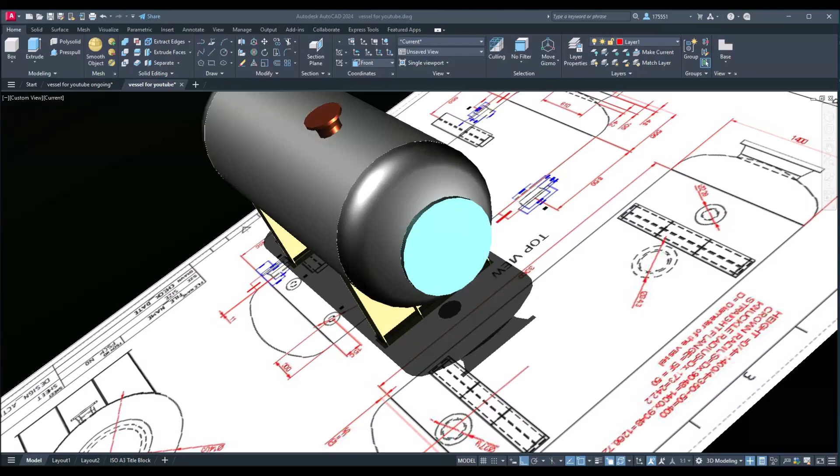In this tutorial, I'll begin by sketching the vessel in 2D before transitioning to a 3D model in AutoCAD.

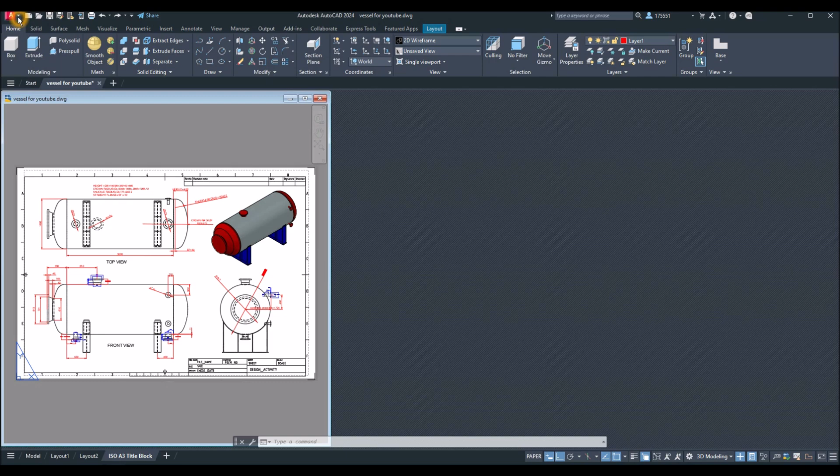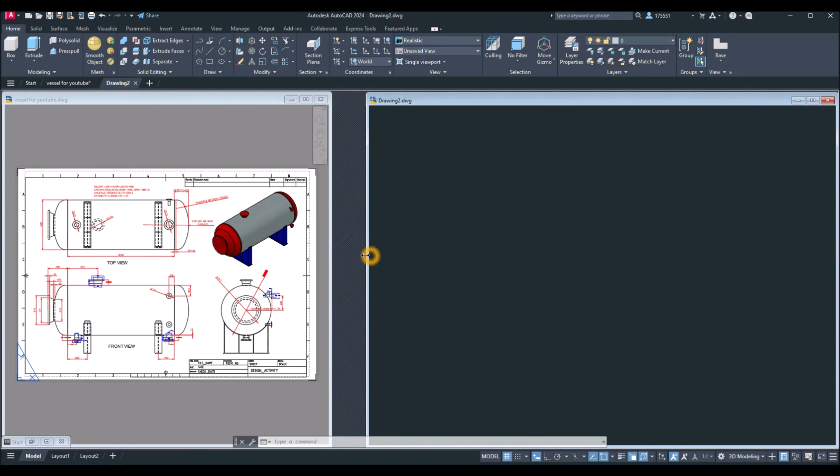Start the drawing by clicking this drop-down arrow and click New for a new drawing. I'm using AutoCAD 3D template for metric units because I'm using millimeters, and click Open. I'll adjust the windows to allocate space for my reference drawing, this one. Make sure to work on parallel projection by clicking this drop down arrow and select parallel. I'm going to start working from front view, which is this drawing here.

Now I'm going to start drawing a rectangle. Go to draw panel inside the ribbon, select rectangle, click here, move your cursor to the right and enter 3000, then comma, and 1400 for the height,

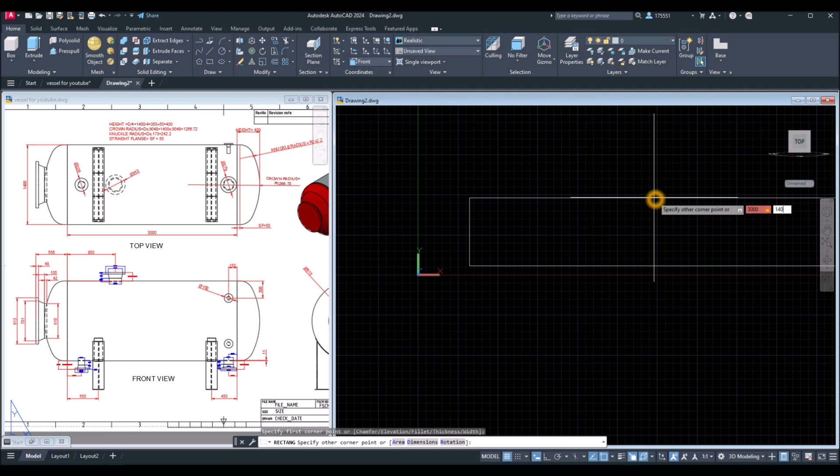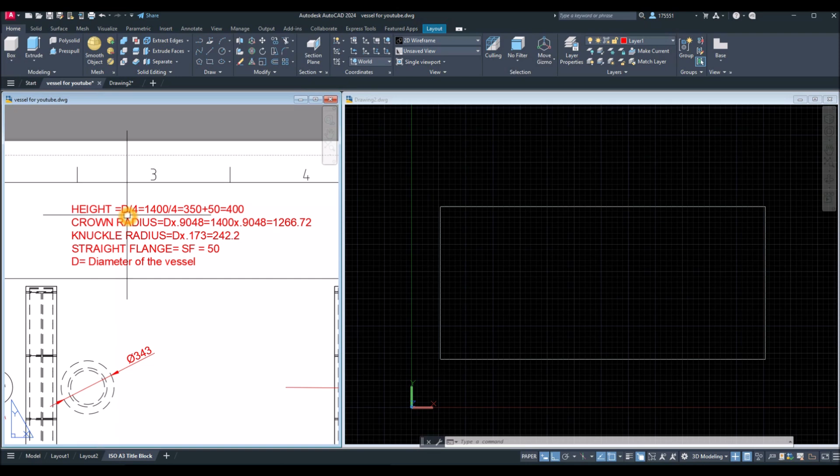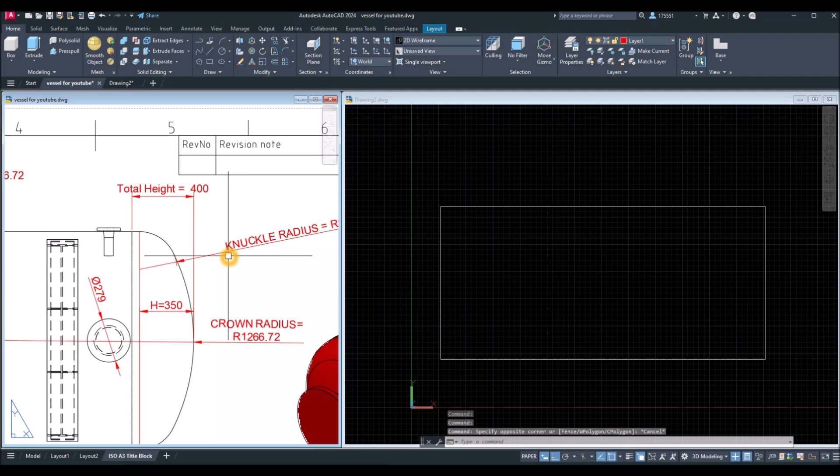and enter. I derived the dimension of the dish head from this formula. D stands for diameter of the vessel, which is 1400. So the height is D divided by 4 plus SF. Diameter divided by 4 is 350 plus 50, so SF is this given straight flange, and for the crown radius it's diameter of the vessel times 0.9048. So this is the crown radius, and for the knuckle radius, which is this one,

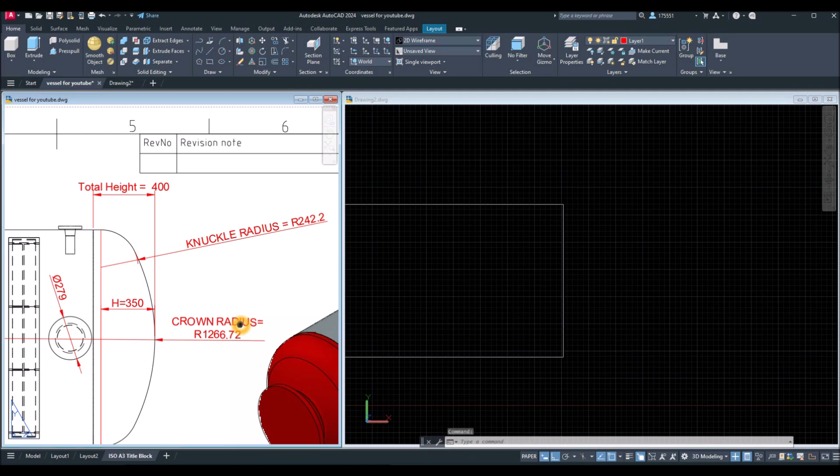is diameter times 0.173. Straight flange is given, and as you can see here, D stands for the diameter of the vessel. Now, I already created a dish head layer, so it's easier to separate the color. And I'm gonna draw a line. So L for line from midpoint, go sideways for 400. And create a circle,

1266.72, and enter. And move this one from quadrant to endpoint. I'm going to draw a line from endpoint and go sideways and trim.

So TR for trim command, enter twice. Click that one, click this unwanted segment, this one. We only need half. And for the knuckle radius, I'm going to use this to create this curve here.

I'm going to use fillet. Inside the modify panel, select fillet command. Right click, select radius option and enter 242.2 and enter. Click this line and click this arc.

Now I'm going to create another line from endpoint to endpoint. Now I'm going to join the segments by typing J for join command, enter, and just window the whole thing. Now this is one object.

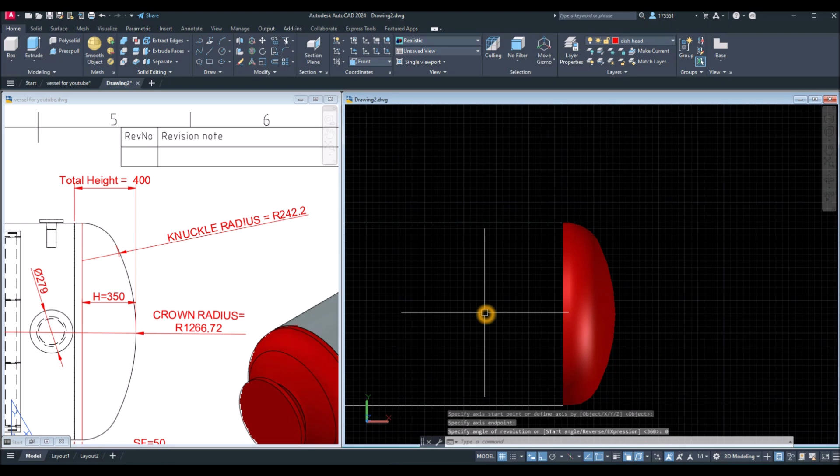Now I'm just gonna mirror this one. Mirror. Specify first point of mirror line. Click that midpoint and go upward and select no.

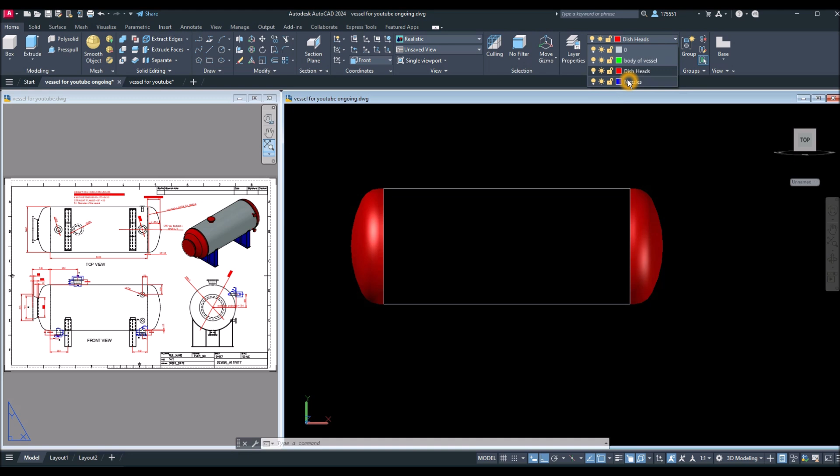I created a new layer, a separate layer for the nozzles. Click this drop down arrow and select nozzles to make it current. Now I'm gonna hide these two. Select the two objects, right click, hover over isolate and select hide objects.

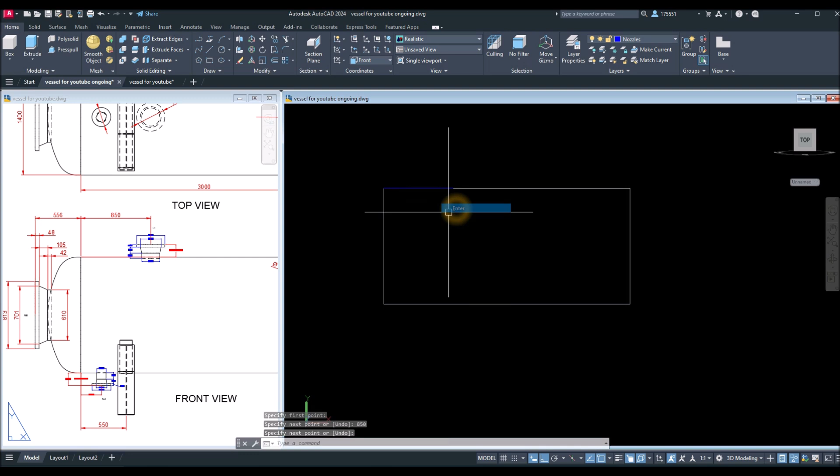Now I'm going to draw a line from the corner of the seam line to the center of the nozzle. This is going to be the guide. So endpoint, go sideways and enter 850 units. And the outside projection from the outside diameter of the vessel is 150 units to the face of this nozzle. So another line from endpoint, go upward for 150.

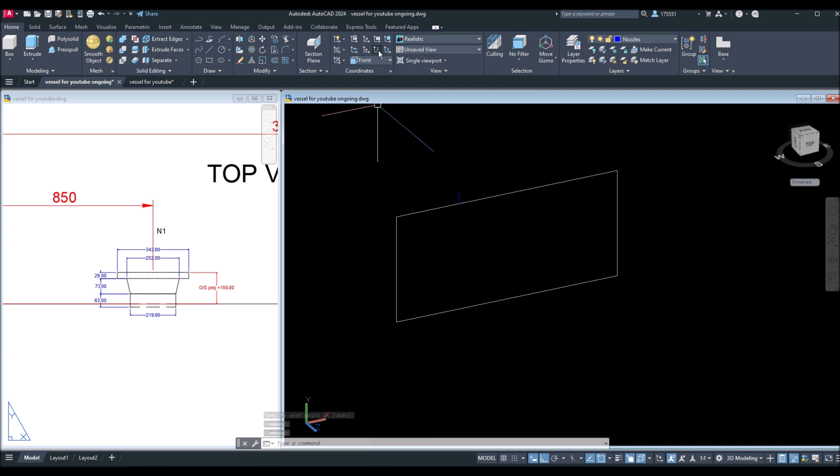Now, hold down the shift key and the wheel of your mouse and move this slightly and change the direction of your Z-axis vector. Inside the coordinates panel, select Z-axis, click anywhere on the screen and move it upward. So Z is the direction of the extrusion.

Now I'm going to create a circle with a diameter of 343. I'm just going to bring this closer. C for circle, snap that endpoint, type D for diameter option and enter 343.

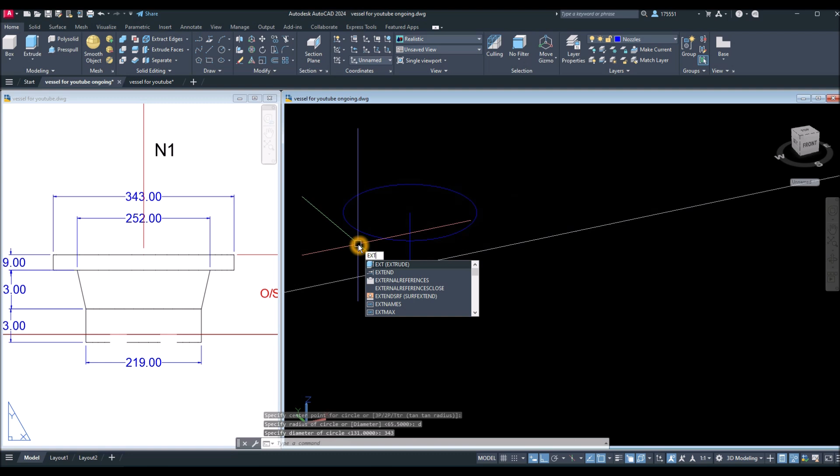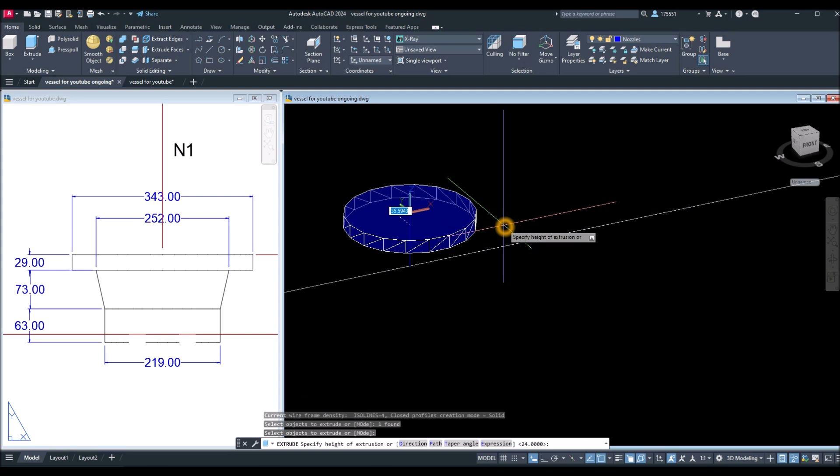Now extrude this circle. EXT for extrude command, select the circle, enter and move downward for the thickness here, which is 29. Maybe change this one to X-ray so it's easier to visualize. So EXT for extrude command, select the circle, go downward for 29.

And create a circle. So I could delete this now, this is just a guide. C for circle, snap the center, type D for diameter option and enter 252, which is this one here.

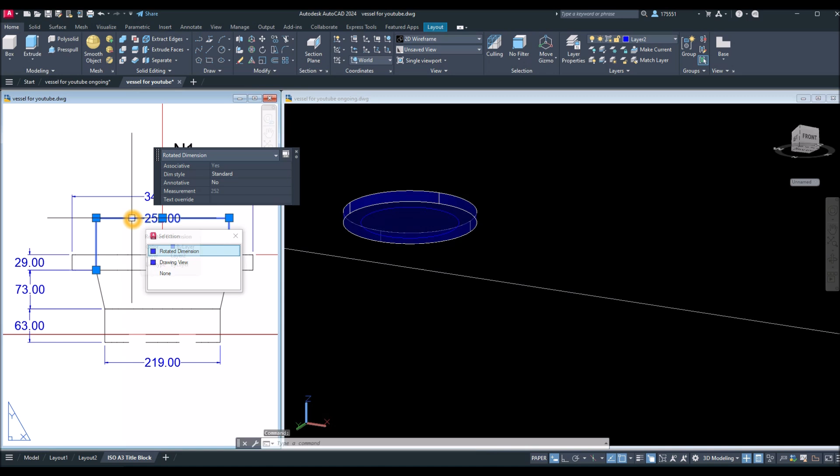Another circle, snap the center, type D for diameter option and enter 219. Now move the smaller circle. You can click anywhere as base point and move it downward. So the gap is 73, so enter 73. So this is the gap

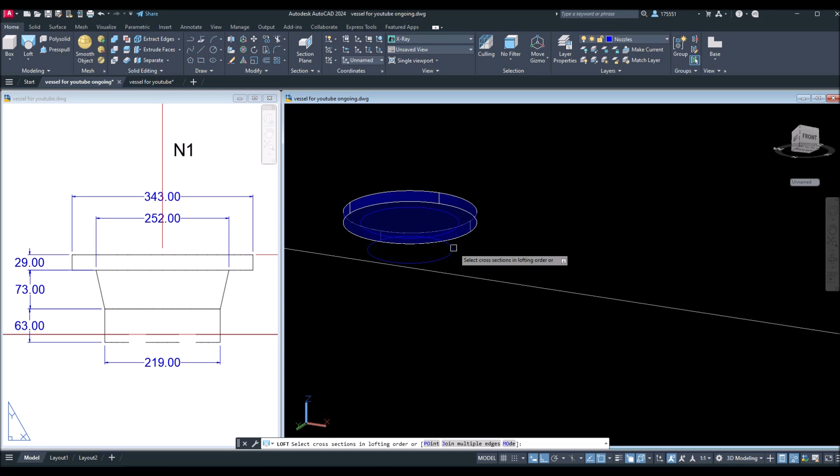between these two circles. Now these two circles are not of the same size, so I'm just going to use the loft command. Inside the modeling panel, click this drop down arrow and select loft, or you can just type in loft. Select that circle and select the other circle. Enter and enter again. Now, the gap here is 63 between these two lines.

So what I'm going to do is just use the press pull command inside the modeling panel. Select press pull, hover over this face, left click, let go of your finger, bring down your mouse for 63 units.

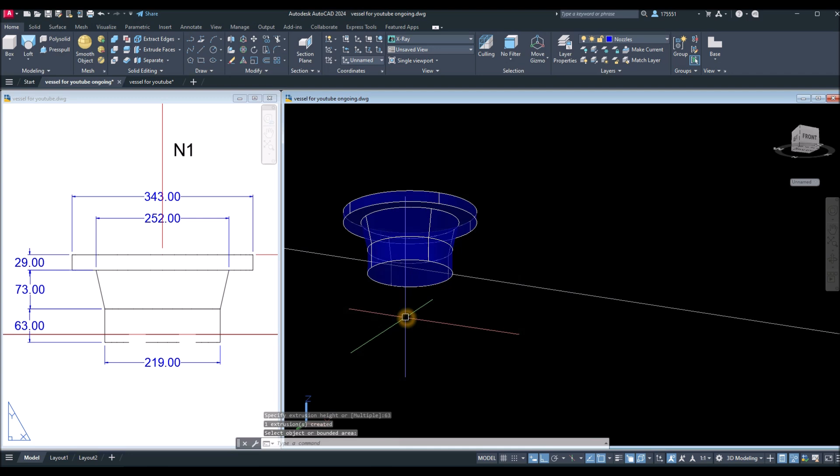Just going to bring this to front view. So our N1, or nozzle 1, is done. The next one would be nozzle 2 at the bottom.

Alright, so another guide from in point. Go sideways for 250, enter. And the outside projection from the outside diameter of the vessel is 150, and enter.

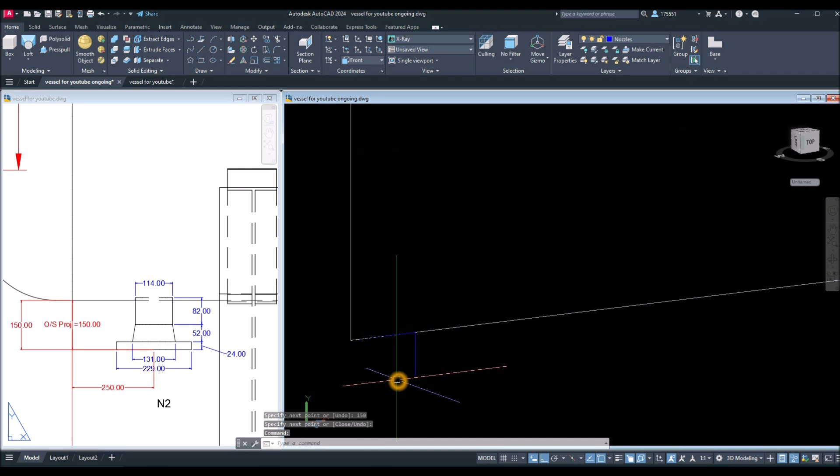Now again, hold down the shift key and the wheel of your mouse at the same time and move this slightly, and reorient your UCS by pointing your Z-axis vector upward. You can do that by going to the coordinates panel, select Z-axis, and move it upward.

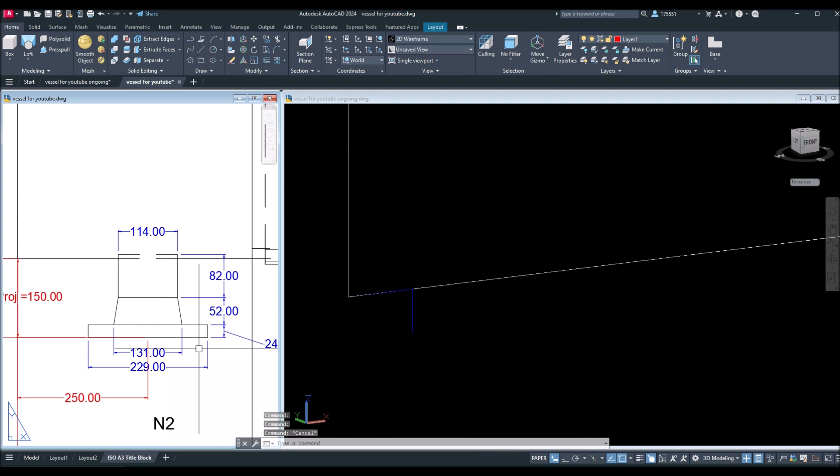Now the first, so this is the face that we have to draw first with a 229 diameter. So C for circle, snap the in point, type D for diameter option, enter, and enter 229.

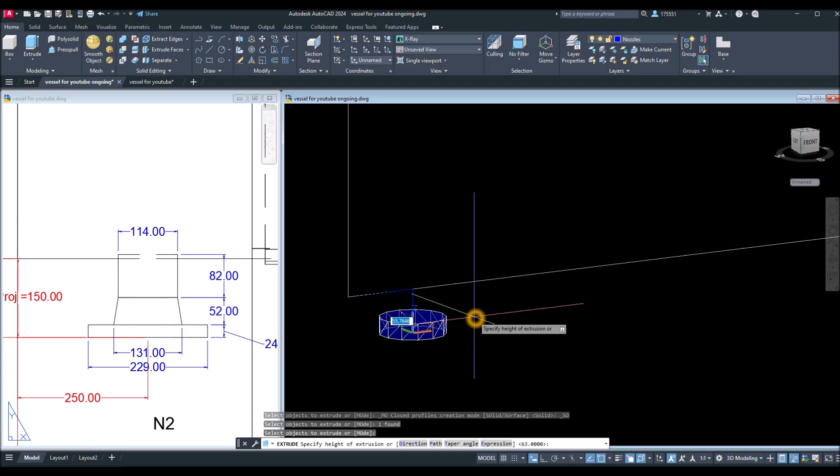And extrude this one. So just you can select extrude command inside the modeling panel, or you can type in EXT, select the object, move upward for the thickness, which is 24. Just give me a sec here. Yeah, it's 24.

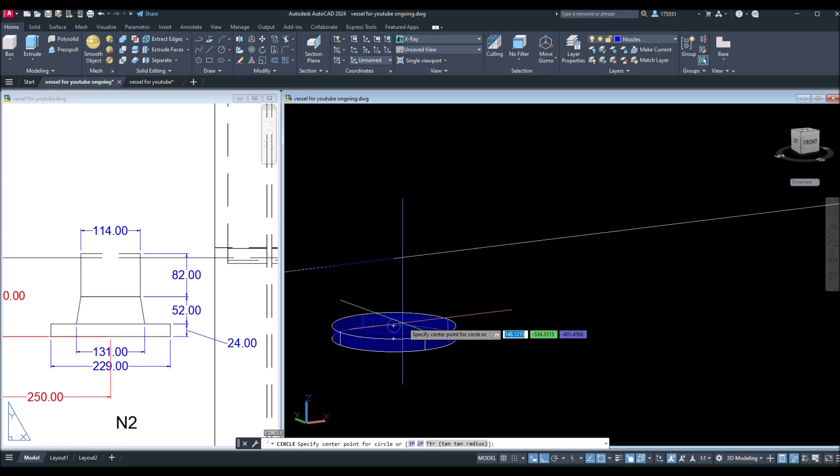Now, I could delete this one now and draw another circle. Snap the center and enter D for diameter option, enter and enter 131. Another circle, snap the center, type D for diameter option, enter and enter 114.

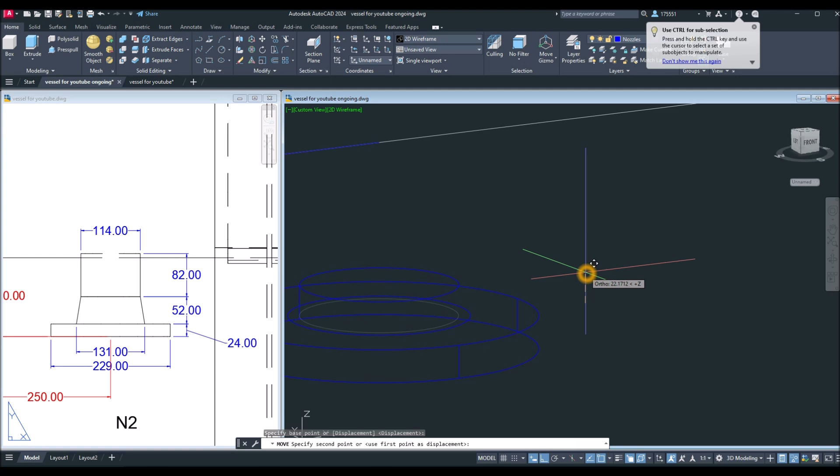So move the smaller circle, this one here, or maybe change this first to the wireframe. Okay, select the circle, the smaller one, right click, move, use anywhere on the screen as base point, move it upward, and the gap there is 52, and enter. So this one here.

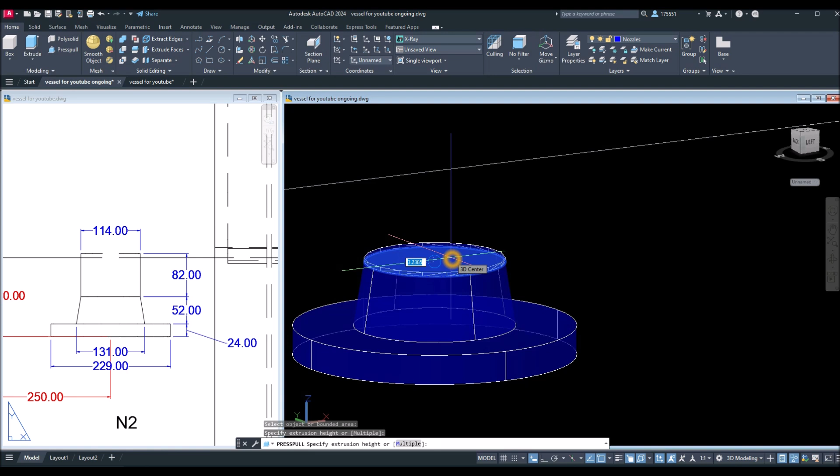Now use loft command, you can type in LOFT, enter, select these two circles, enter and enter again. I'm just gonna bring this to X-ray. So press pull command inside the modeling panel, hover over this face. Once it's highlighted, left click, let go of your finger, move the mouse upward for 82 units.

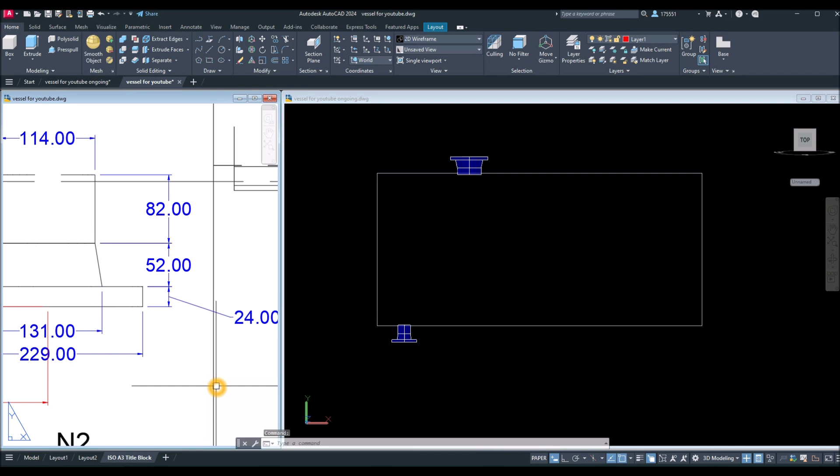Just gonna bring this to front view and see if our nozzle is not skewed. So I think we're good. Now the next nozzle would be this from this corner here. Alright.

Okay, another guide. So L for line, click the endpoint, go sideways for 150. And the outside projection is also 150, so bring this down for 150. Alright.

Now, C for circle. Oh, again, see the orientation of the UCS. We have to change the direction by clicking Z-axis vector, click anywhere on the screen and move it upward. C for circle, snap the endpoint, type D for diameter option, enter, and enter 279.

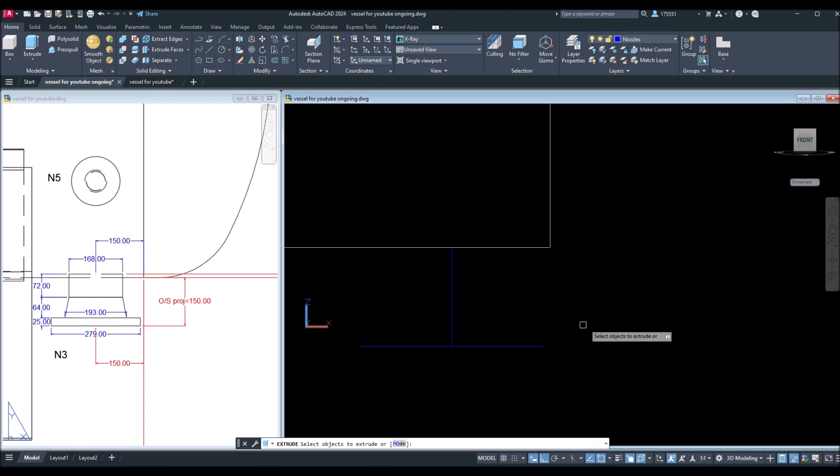And extrude this one upward for 25 units, which is a thickness. So hold down the shift key and the wheel of your mouse, move it slightly, remove this line.

Draw a circle from the center. Type D for diameter option, enter, and enter 193, which is this one here. The other circle has a diameter of 168. So C for circle, snap the center, type D for diameter option, and enter 168.

Now move this smaller circle, click anywhere on the screen as base point and move it upward, and the gap there is 64. So this is the gap. Now use loft command, LOFT, select this circle and this circle, enter and enter again.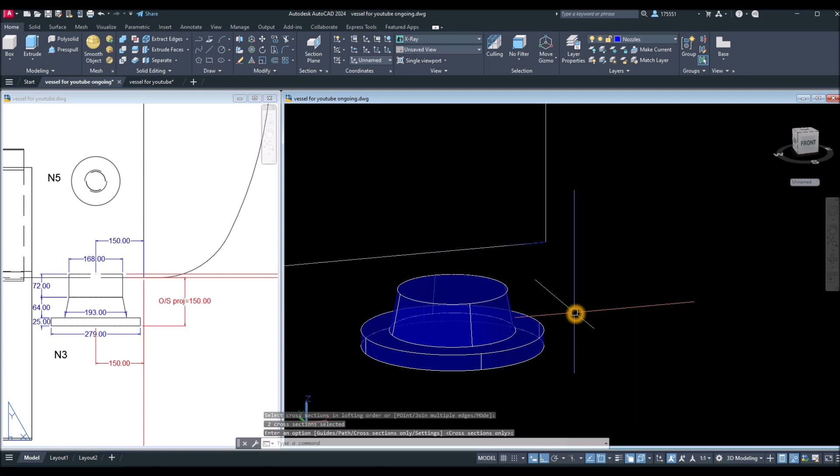Now pull this face for 72 units. So use press pull command, hover over this face. Once it's highlighted, left click, let go of your finger, pull it upward for 72 units and enter.

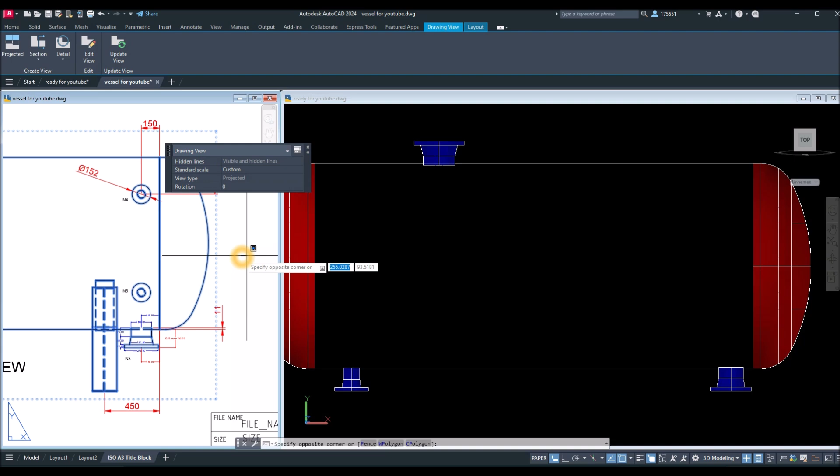The next nozzle I'm gonna draw is N4, and N4 and N5 have the same dimension. So what I'm gonna do is just mirror this one later. So if you look at from side view, you can see these two nozzles sticking out.

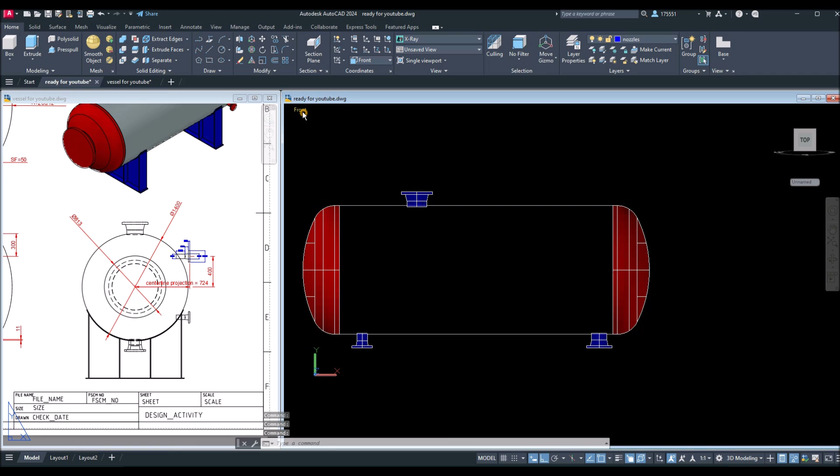So this is N4, this one here, and this is N5. So I'm going to create another circle, or bring this one to left view. So C for circle, click anywhere here.

And as you know, the diameter of your vessel is 1,400 diameter. So you could correct that by clicking this one, and this quick property will show, and just change it because that's radius. Change the diameter to 1,400 and enter.

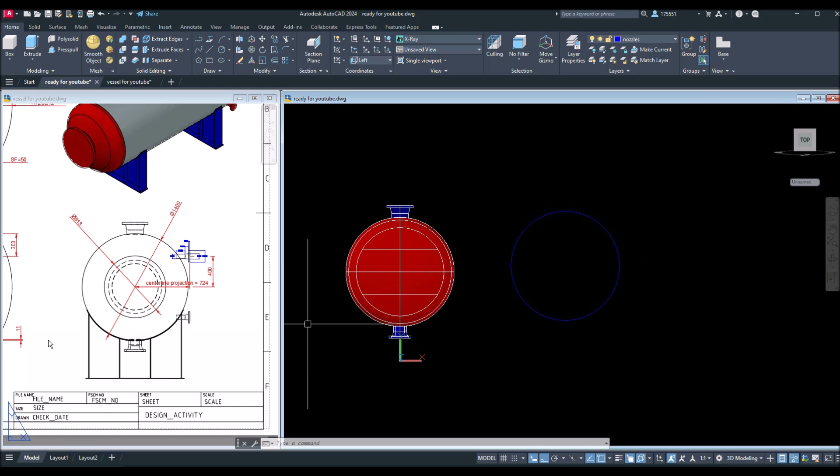All right. Now, the center line projection is 724. So what I'm going to do is draw a line from center, go sideways for 724 and enter. And from this projection, you move upward for 400 to hit the face of this nozzle, the center of that nozzle. So 400.

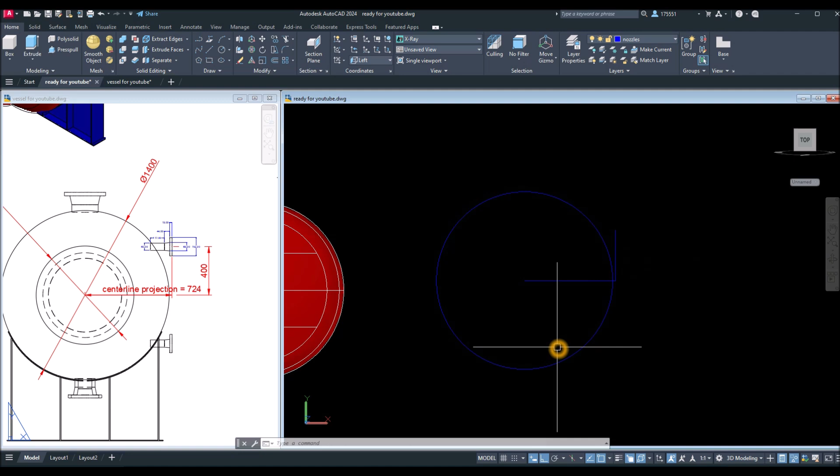So this is where we're gonna draw the flange of the nozzle. So hold down the shift key and the wheel of your mouse at the same time. Just move it slightly and change the direction again of your Z-axis vector, and click anywhere here and point it to that direction, because that's the direction of the extrusion.

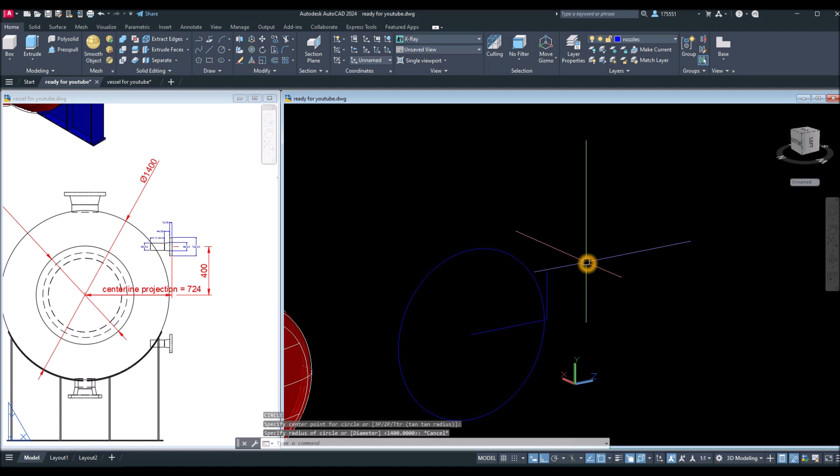All right. C. Click that endpoint. Type D. I'm just gonna bring this closer. Just give me a sec here. There. All right. C again.

Click that endpoint. Type D for diameter option and enter 152. And extrude this one for 19 units, which is this one here. So EXT for extrude command, select this circle and extrude it inward for 19 units.

And create a loft with a diameter of 69 and the other end is 60. So another circle. Shift right click, snap the center, type D for diameter option and enter 69. I'm just gonna remove this one. And then another circle.

Snap the center, type D for diameter option and enter 60.

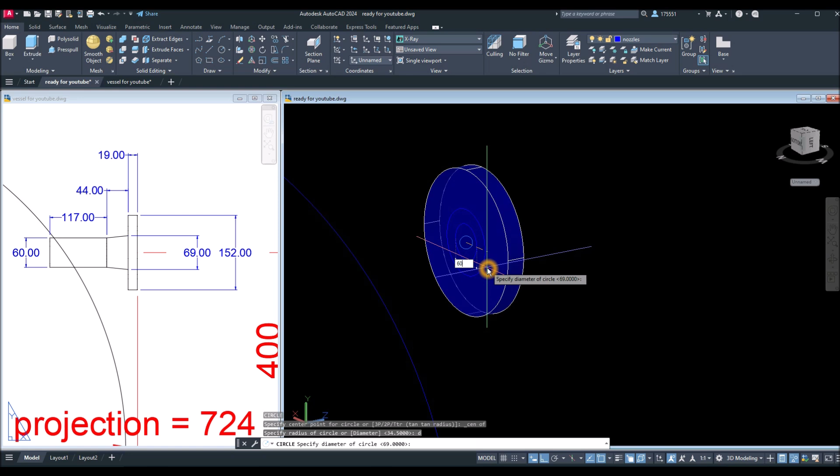Now I'm gonna move this circle, the smaller one. Move, make sure ortho mode is on. Click anywhere, move it sideways or to your left. For the gap is 44, and enter. See this one here?

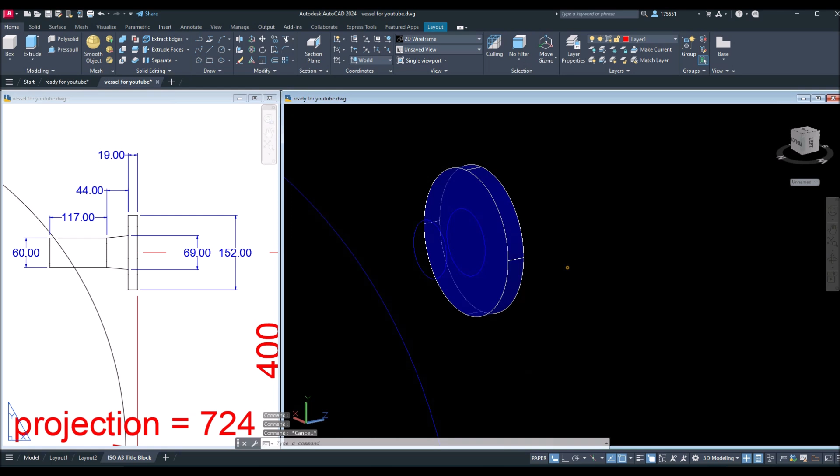Now use loft command, LOFT. Select this circle and this circle, enter and enter again. And this cylinder here, we can just extrude the face for 117.

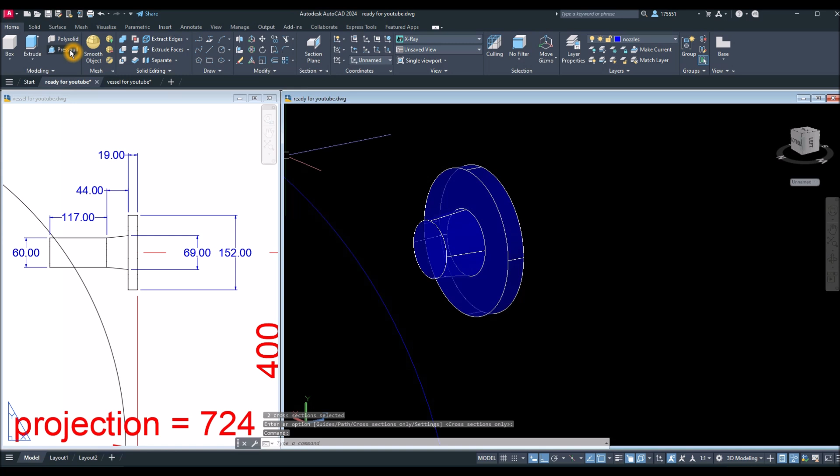So I'm going to use press pull command. Hover over this face, once it's highlighted, left click, let go of your finger, move your mouse sideways and enter 117 and enter. Here you go.

And then I'm going to bring this back to left view and mirror this nozzle. So MI for mirror command. When you do that, specify first point of mirror line, click this endpoint, go sideways, and select no.

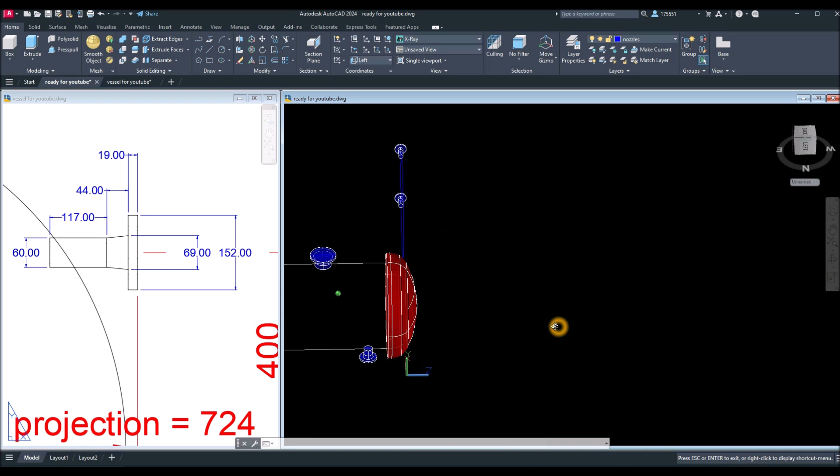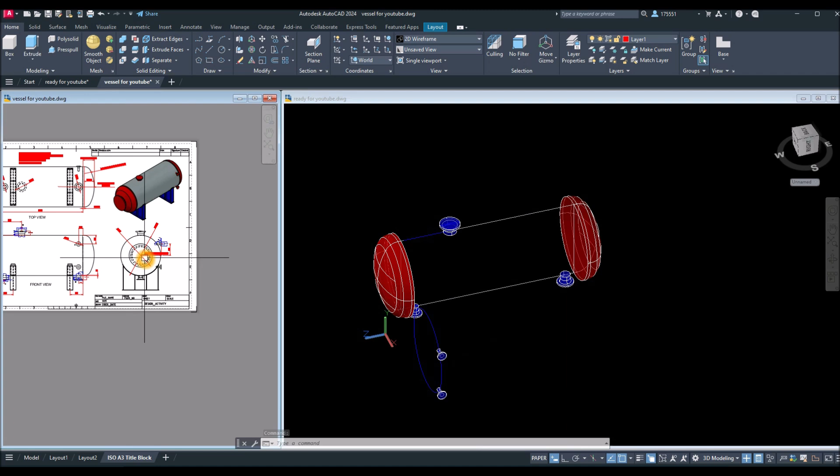Now I could delete this one now. And then I'm gonna move that one. Oh, this side here. So it's easy to make a mistake, so make sure to remember the mark. So this one here, so this two is near. Okay, I'm gonna check. Yeah, it's near here, this nozzle.

All right, so what I'm gonna do is hide this one first, so it's easier to visualize. So hide object and move from center to the midpoint here.

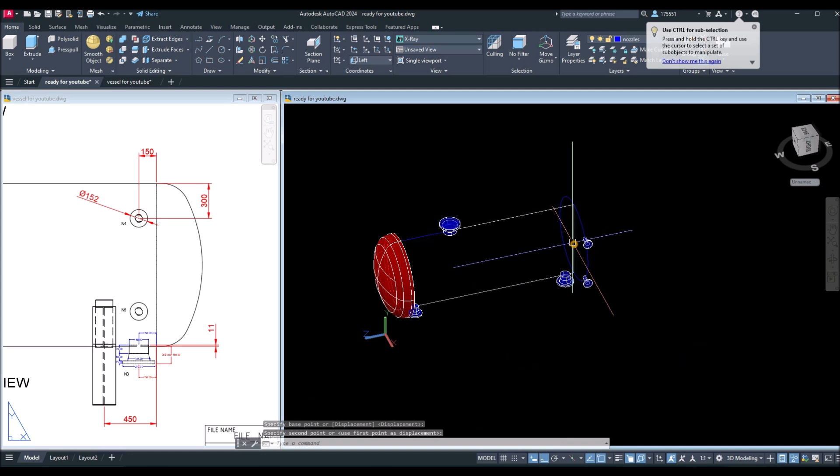As you can see here, the distance from the seam line to the center of the nozzle is 150. So I'm gonna move these two, or maybe leave this one here. Just select the whole thing, press the shift key and deselect this circle, move. We just want the two nozzles to move from that quadrant, to this direction for 150.

See, we left the circle because we need that to extrude.

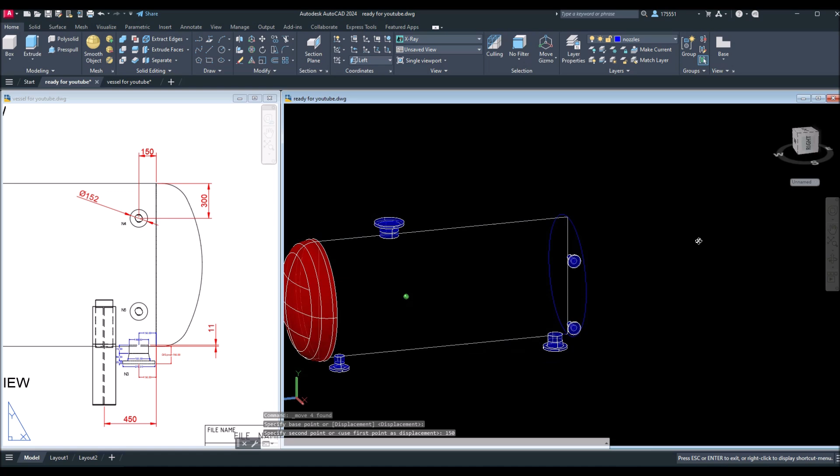The next nozzle I'm gonna draw is this manhole here. I think this is a manhole because this is very large. So what I'm gonna do first is hide this one.

So select the object, hover over isolate and select hide objects. As you can see, the face from this flange to the end, or the line here, the seam line is 556. So I could just draw the distance from the midpoint, go sideways for 556.

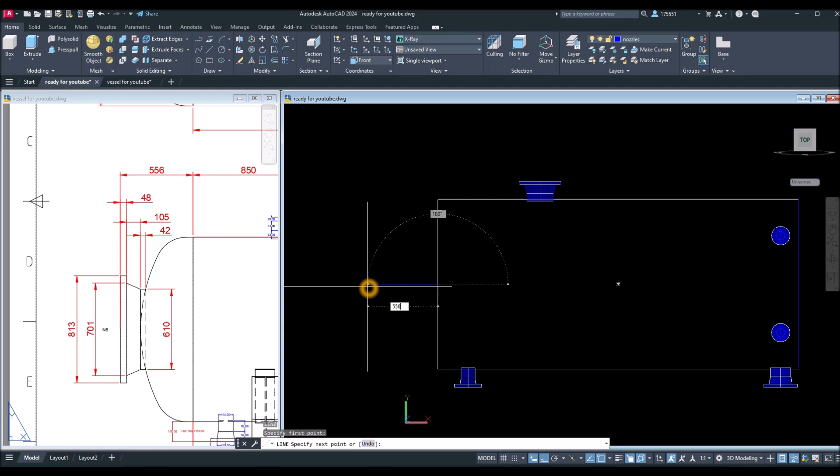And change the direction of the Z-axis vector to Z. Click anywhere on the screen and move it to that direction parallel to the direction of the extrusion. So C for circle from the endpoint, type D for diameter option and enter 813.

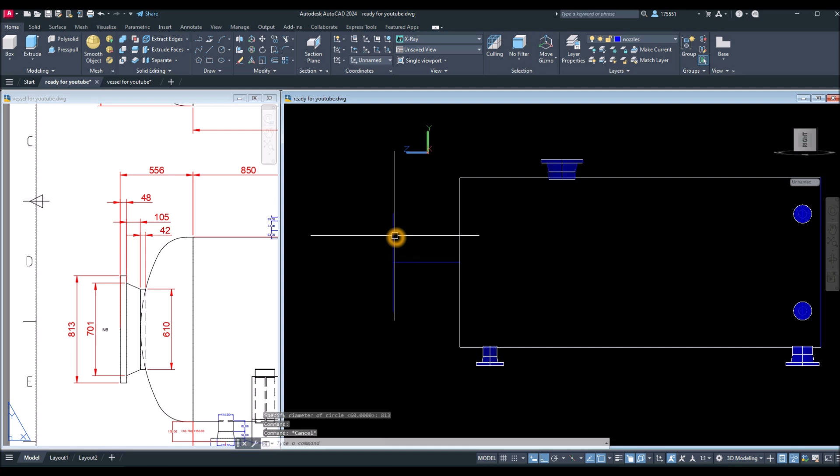So just hold down the shift key and the wheel of your mouse and just move this slightly. And type in EXT for extrude command. Select this circle and move it inside or towards that direction for the thickness, which is 48, this one here.

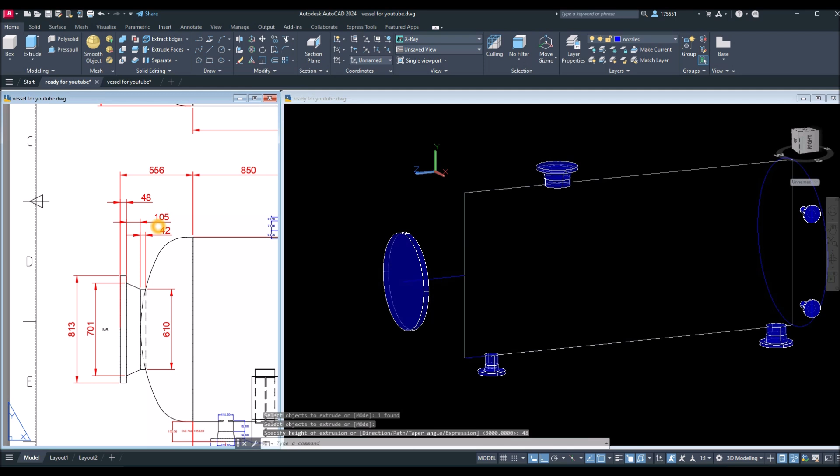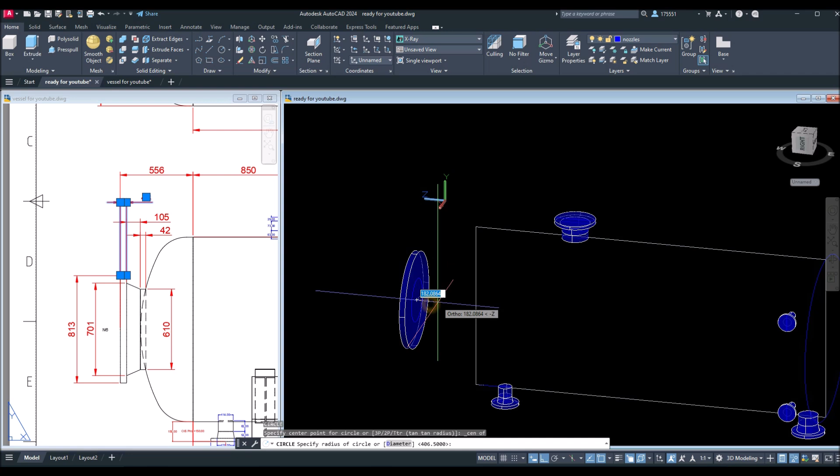Now the next one is create a loft. Hold down the shift key again, and I'm just going to remove this line and create another circle. Hover over the center, so just shift right click and select center just to make sure. Snap that this second cross. There are two crosses, snap that one there because the other one is the center of that other face. So type D for diameter option, enter, and enter.

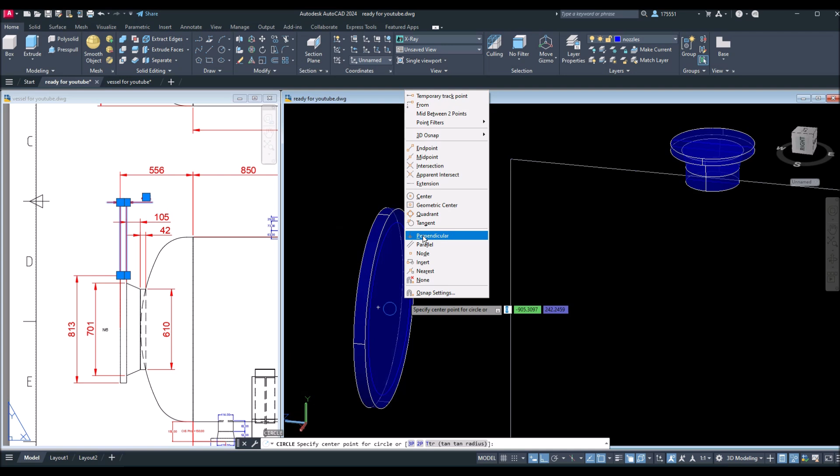701. And then create another circle, snap the center, so shift right click again, snap the center, type D for diameter option, enter, and enter 610, which is this one here.

Now the gap between these two circles is 105. So what I'm gonna do is move this smaller circle, click anywhere, and make sure your ortho mode is on. We don't want our flange to get skewed. So move it towards the center or inside the vessel and enter 105.

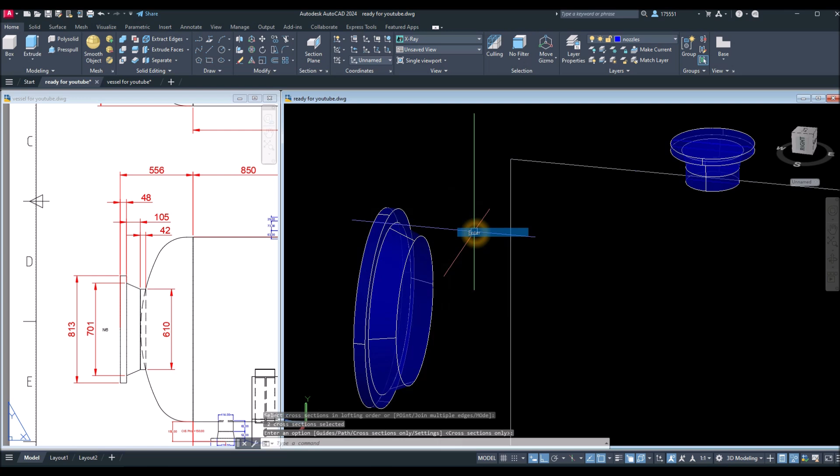Now use loft command, LOFT. Select this circle and this circle, enter and enter again. I'm just gonna change this to shaded with edges or maybe conceptual, it's easier to see. And I'm gonna extrude this face for 42 units, which is this one here.

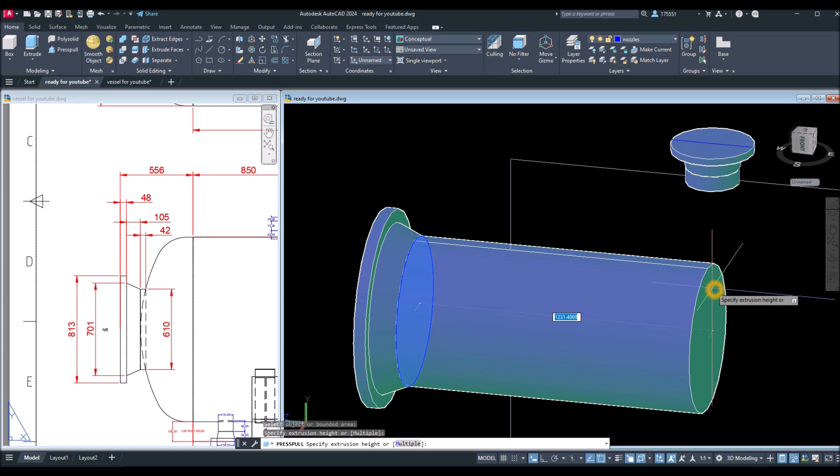So this time I'm gonna use press pull command. Hover over this face, once it's highlighted, left click, let go of your finger and press it or pull it towards this direction for 42 units. And our manhole is done.

So what I'm gonna do is just right click anywhere on the screen, hover over isolate and select end object isolation. Alright, the next thing I'm gonna do is extrude.

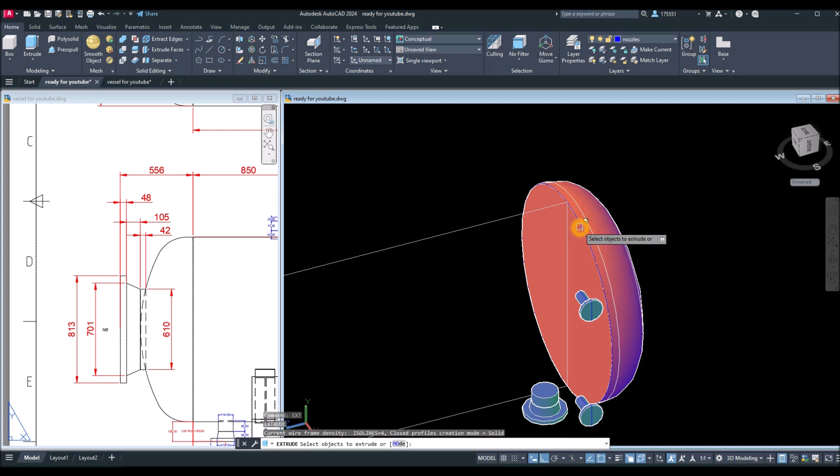Remember this circle here that we left on the end of this corner. So select that circle and extrude, or you can type in EXT first for extrude command. Select that circle, enter, and extrude it up to the quadrant of this dish.

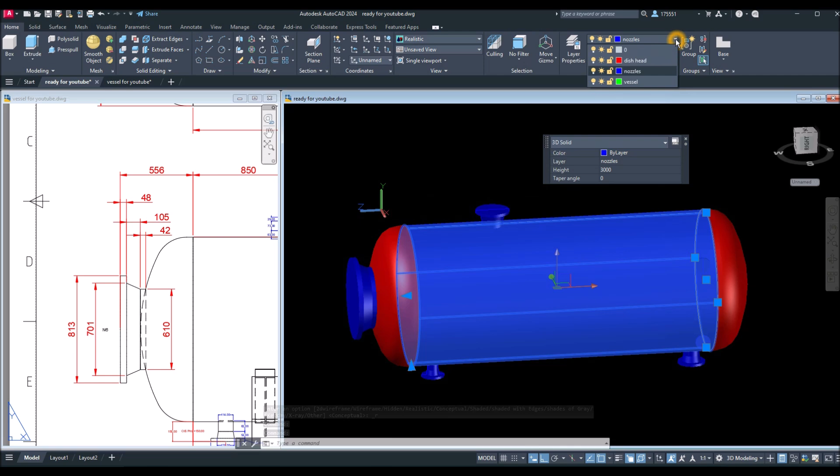And change this one to realistic. And I'm just gonna change the color of this one to separate it from the nozzles. So I created a vessel layer here. Now it's easy to see. Here you go, and our vessel is done.

And the next tutorial or the next video would be creating the saddle that supports the vessel. So I'm gonna show you how it looks. So model this one here, these two saddles.